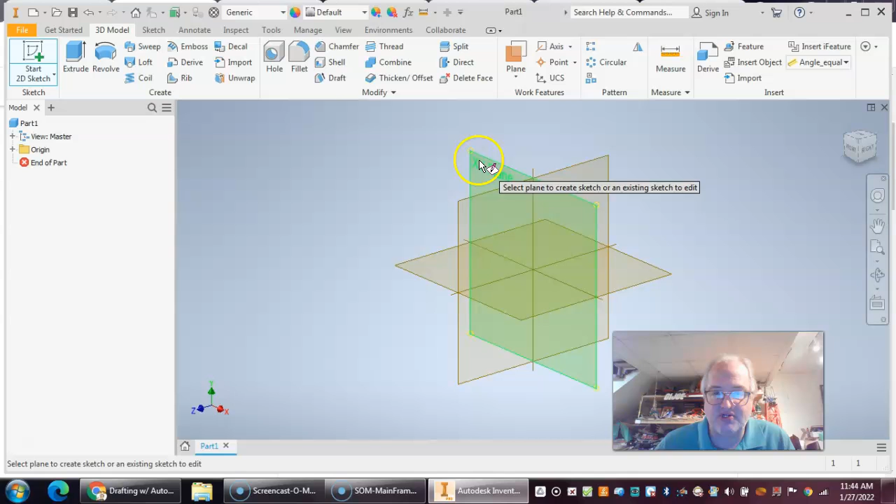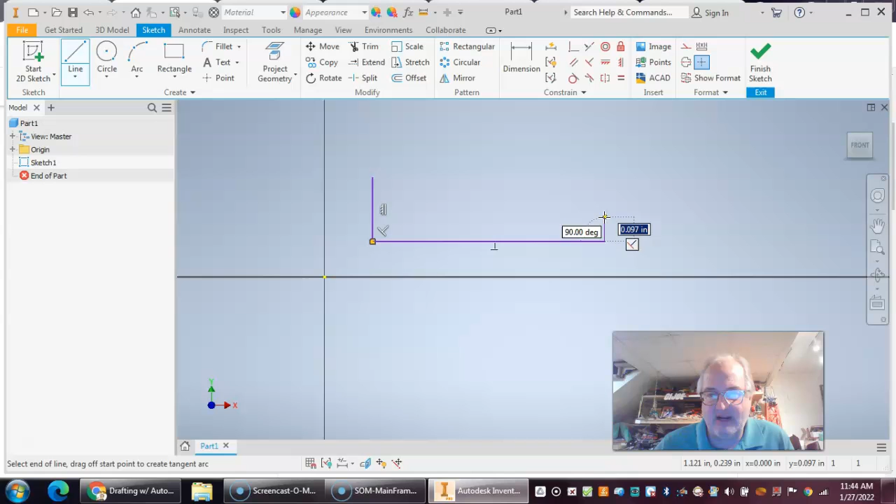Now, I like to sketch on the XY plane, so we're going to do this. I don't have to start with any dimensions at all right now. All I need to do is start a sketch, so I'm just going to take my line tool and pre-draw this. I'm not even worried about dimensions. I'm making sure I'm locking things in at 90 degrees here, and notice I can come back in, get that 90 degrees, and finish that off.

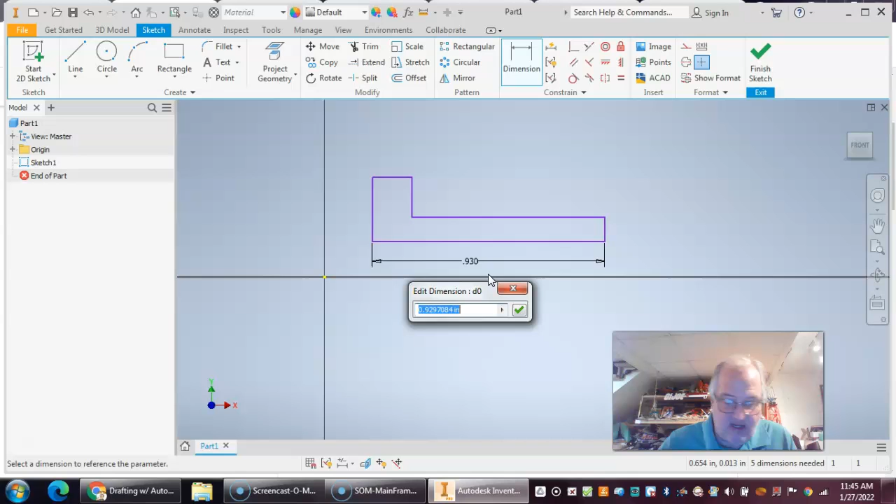That's all I need. Now I can start to apply some dimensional constraints. So I want this line here to be 4.469. There you go - notice how it zoomed out on us as it extended that line. And here I want this dimension to be 0.156. So I've got that taken care of now.

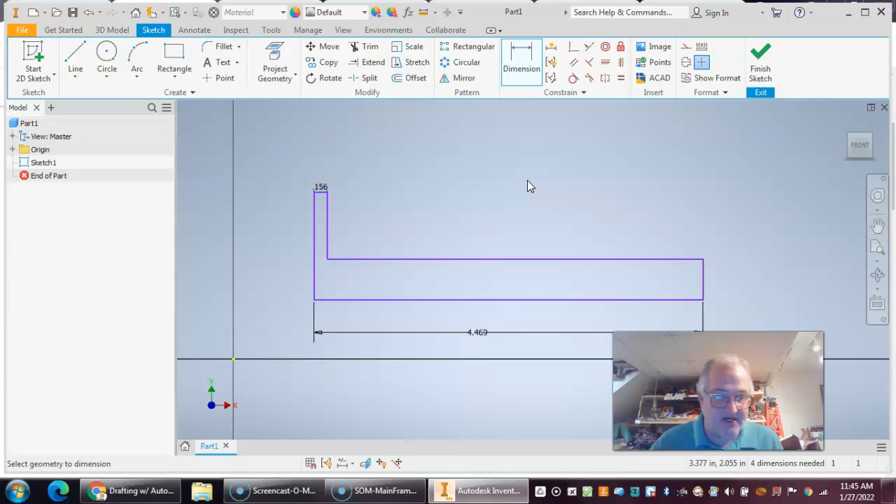It's not really given to us in our drawing, but we do need some other dimensions here. So as you think about this, we can put a dimension on this. Let's see, that's 1.237 - you know what, I'm going to say that this is 1.125. There you go. And I'm going to come in here and dimension this at 0.375, just to give it a little shot there. Now that's the only thing I need to worry about right now.

Actually, taking a look at the print, you'll see I did make some mistakes here. As I'm looking at the dimension, my OD on this particular part, the outside dimension, is 1 3/8. And my inside dimension is showing that it's 1/4 of an inch off. So actually they're saying this dimension should be 1/4 of an inch. I apologize, I should have looked at that earlier - I wasn't looking at that print correctly.

So let's fix this right now while we can. That's 1/4 of an inch right there like that. So I think we're pretty good on that.

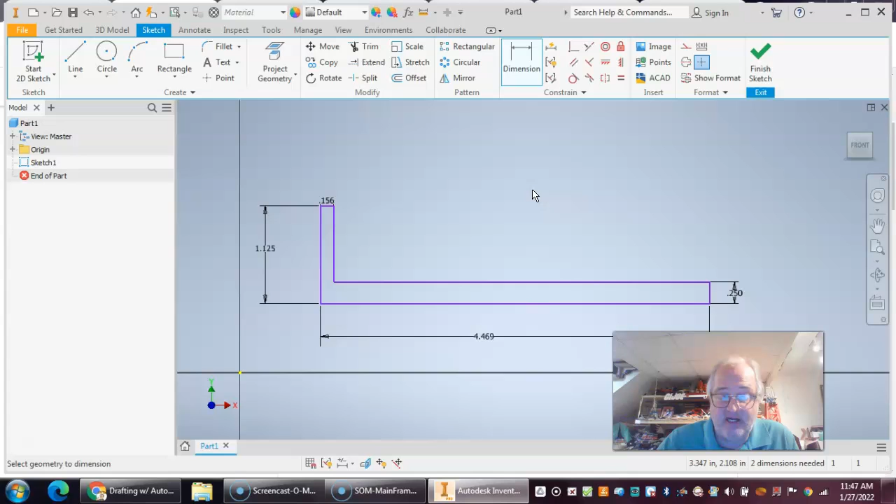Now the other thing we need to do - this is going to be revolved around an axial plane, and we need to create a center line to do that. A good center line is a construction line. So up here in our sketch tab under the format panel, we have our construction line. I'm going to click on that to create my construction line, then go to the line tool and just real quick draw a horizontal line across from there. Notice when I do that using the construction line, it automatically gives me that dotted construction line look.

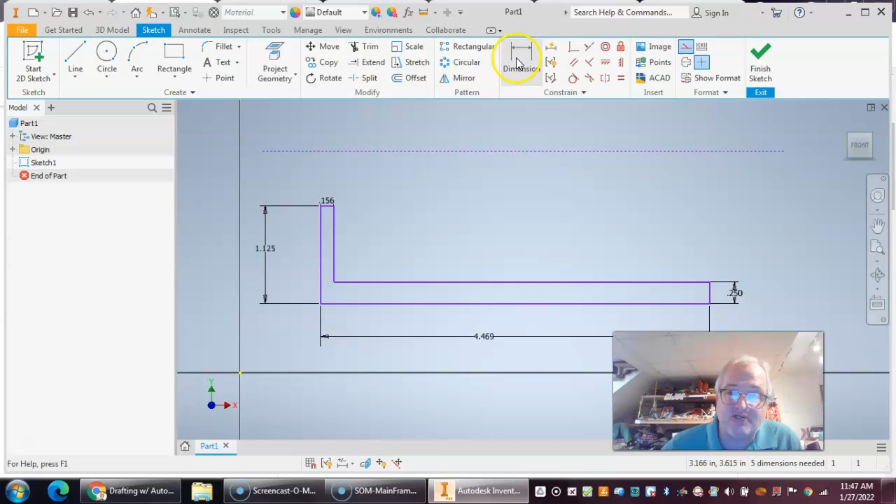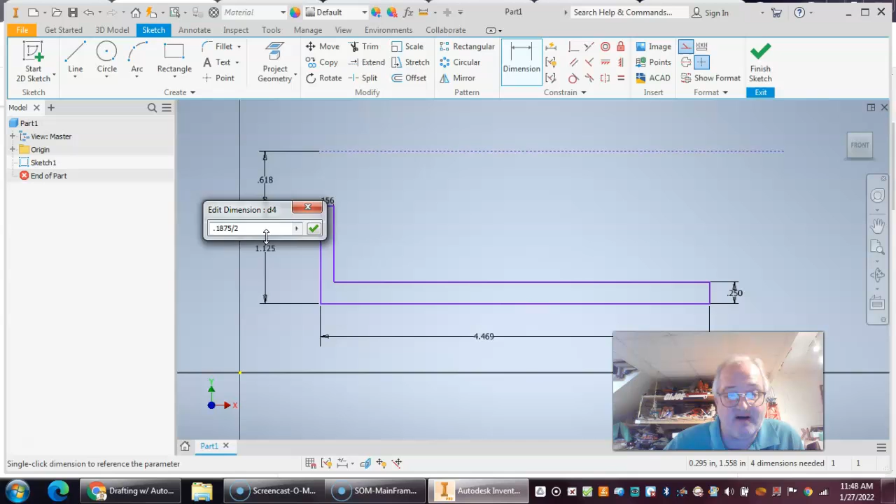Now I just need to fix this and give it a distance so that I am correct on my size. So I'm going to dimension it from here to there, and that dimension - our hole diameter is 0.1875 - so we need to be half of that. I'm going to go 0.1875 divided by 2. I can put formulas in here, and I'll click enter. That works out to be 0.094. So this sketch is done - I'm going to hit finish sketch.

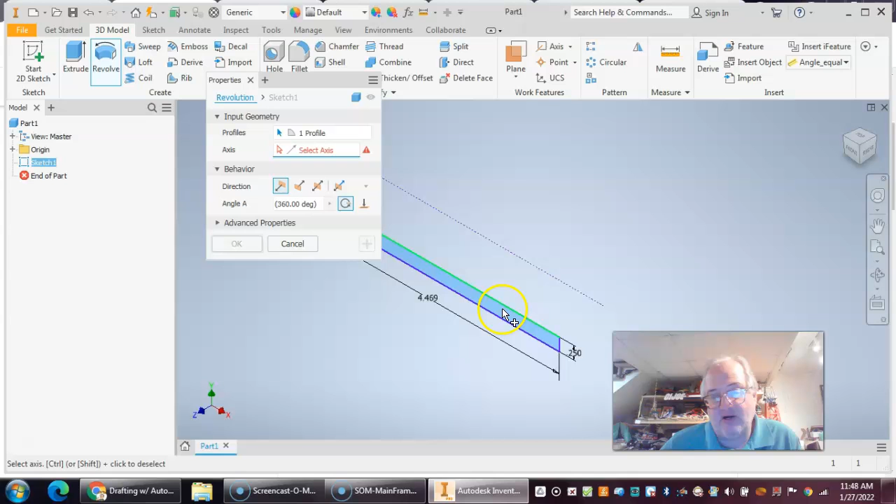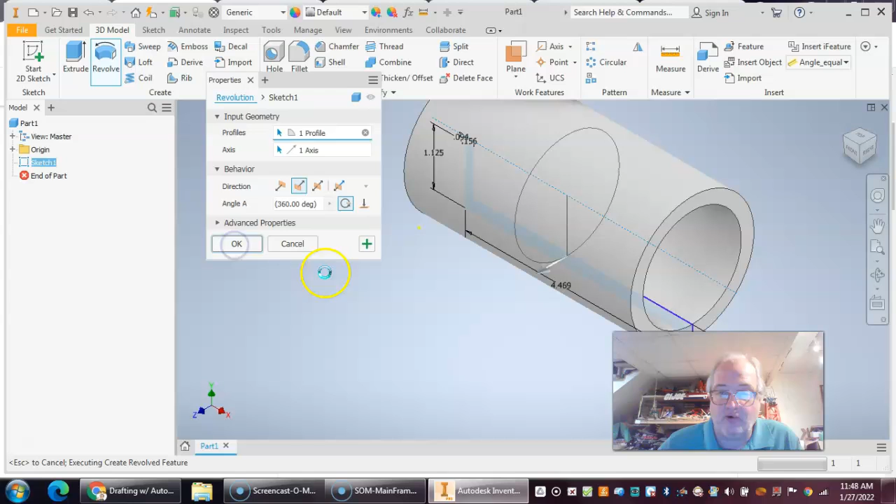Zoom out, and now this is just using my revolve tool. When I use the revolve tool, it should automatically pick up on the closed feature or closed surface that you want, and then you have to select the axis. So the next step is just to select that construction line, and it should generate - my computer's running a little slow here, so there we go. Click OK.

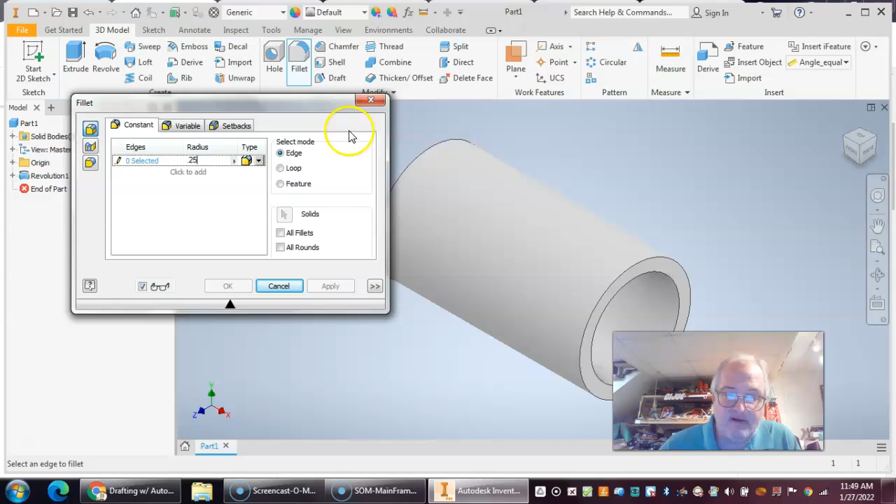So now I have my full rotation - kind of look at this as it goes around - but we still need to add some radiuses here as well, and you'll see that it's a 1/4 inch typical radius. So I'm going to go to my fillet tool. We're going to change this radius to 0.25, and then I'm going to click on this edge and this edge to make that a 1/4 inch. Hit apply, cancel out to finish it, and there we go.

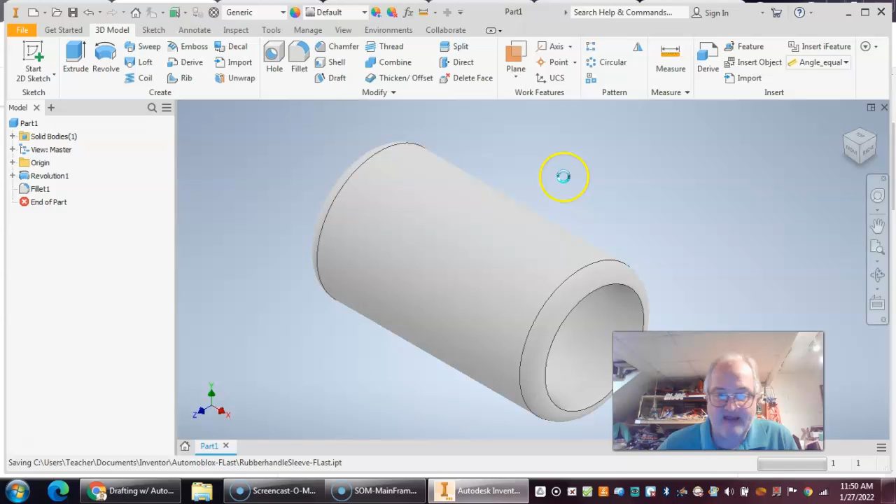So this part is finished. It's asking us to revolve and save. So this is going to be File, Save As - this is rubber handle sleeve, hyphen, first initial, last name. We'll save that - notice how it's automatically putting it in my Automoblox file folder, this project file folder. That's going to save us a lot of time and aggravation later on. Hit save - this part is finished. We're ready to move on to the next.